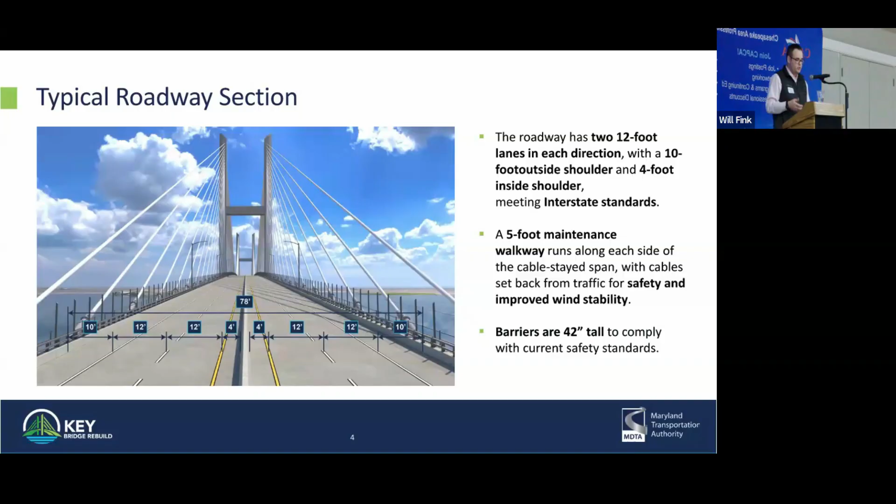Looking at the bridge layout itself, the distance between the 2 towers, which constitutes the main span of the bridge, is approximately 1,665 feet. The old bridge's distance between the 2 towers was approximately 1,200 feet, so we're several hundred feet farther from the channel in both directions compared to the previous bridge. This bridge is also a little unique in that it's very symmetrical in its backspan, with the overall length being approximately double the main channel width.

We'll have a minimum vertical clearance of 230 feet above the navigation channel. And because the channel is 800 feet wide, the center of the bridge is actually 10 or 15 feet higher than that minimum vertical clearance.

So as I alluded to before, with the cable stays and the cable strands, there's 144 of those, 72 on each tower, and then they're distributed evenly so that there are, I believe, 18 sections going out towards the middle on each side, and each of those cables supports one of those sections of deck.

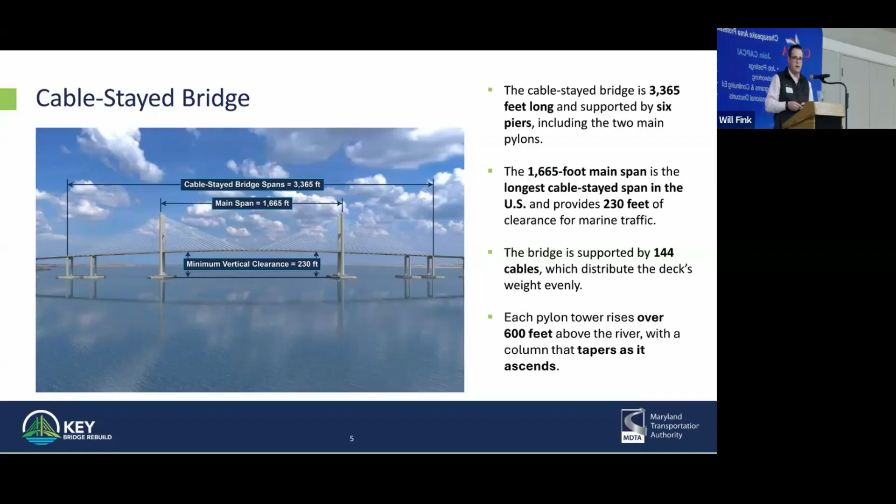Those are oriented in that goalpost or tower-like design that you've seen in the previous renderings.

The foundations with the cable stayed bridge are substantial. They have to resist a tremendous amount of force as they span such a wide distance. They have 6 total piers, 3 on each side. We're looking at the southern side, and it's mirrored on the north side here. Each half of the bridge comes with a pylon that then goes into a tie-down pier and transitions to a more conventional bridge type at the transition pier. The transition pier and tie-down pier work together in order to withstand a lot of the uplift forces experienced on that side of the bridge.

Each of these smaller foundations, and I say small in quotes, they're quite large. Each of the smaller foundations here on the transition and tie down are founded with 10 8-foot diameter steel pipe piles that are all in excess of 200 feet in length. If you've seen us handling any of our large piling in the harbor over the past few months, those are those elements. We have 10 in each of those foundations.

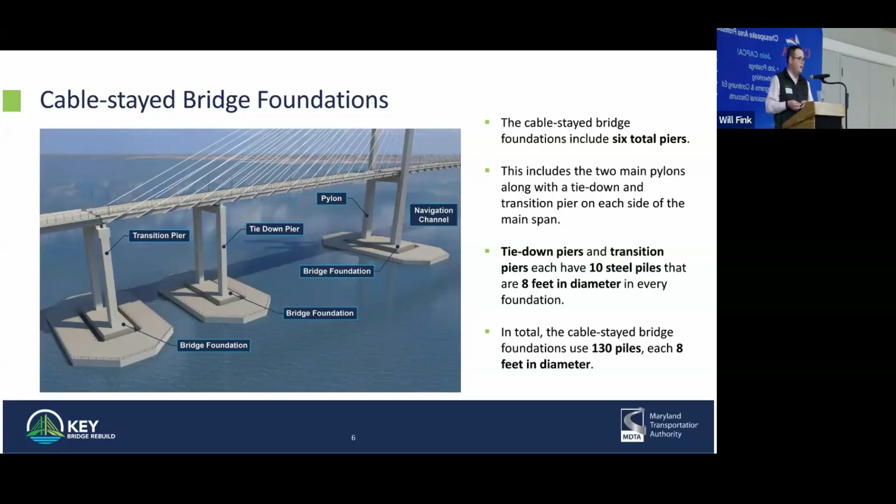And in the main bridge foundation, we have 45 of those large pipe piles. So that's 10 plus 10 plus 45 is 65. So we have 130 in the bridge itself. But that's dwarfed by the number that is in the vessel protection. And we'll get into that a little bit later.

So looking at a cross section here of those pile foundations, and this is our main pylon. It has those 45 8-foot pipe piles in a 5x9 formation. Like it says here, they're over 200 feet long and embedded 60 to 70 feet or so into what we call the Patapsco geological layer. It's a very dense sand layer that supports the bridge.

The Patapsco in some locations is 80 to 100 feet below the water surface, so there's a significant distance to go before we even get to that sound bearing layer, which is why the piles are so long.

The footing that we have is approximately 100 feet by 176 feet. We like to compare everything to sports stadiums and courts and whatnot, so this is approximately 2 NBA regulation basketball courts. The pile cap is actually above the water line and out of the splash zone, and that's in order to make it a more constructible element.

That pile cap is approximately 20 feet thick. Each of the pile caps is 13,000 cubic yards of concrete, which is an enormous amount of concrete that will get poured in 3 different lifts. Each of those lifts will take us approximately 36 hours to pour, with continual concrete delivery through those lifts where we're pouring 6 to 7 to 8 feet of concrete at a time. So you can see each foundation will have over 13 hundred truckloads of concrete, again placed in 3 layers.

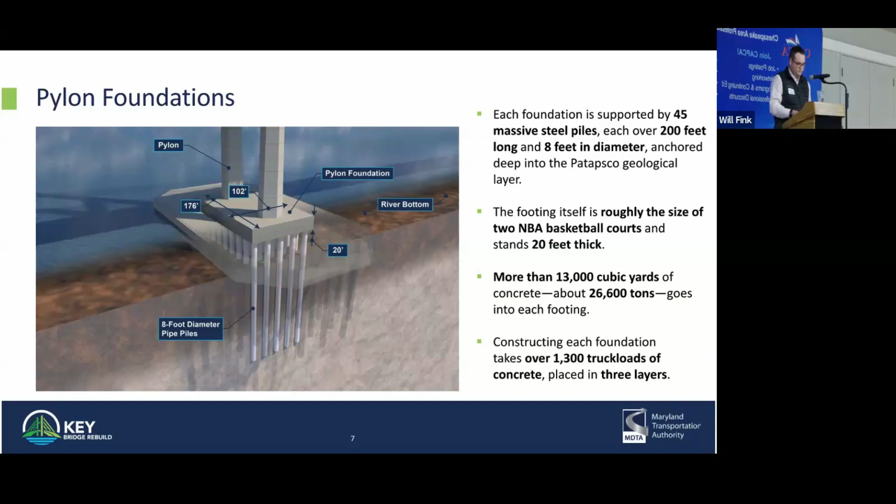Go into the pier protection system, and this is looking at that main pylon again. The pylon's foundation itself was large, about 100 by 176. The vessel protection or pier protection system is almost twice again as large, or more, where it's 374 feet on the long axis and 214 feet on the short axis.

I said that each of those main pylon foundations had 45 of those steel pipe piles. The pier protection system at the main foundations alone have 78. So they have half again, or almost twice as many piles as the foundation system that's holding up the entire bridge, and that's to withstand vessel impact in the event of any sort of future unfortunate events.

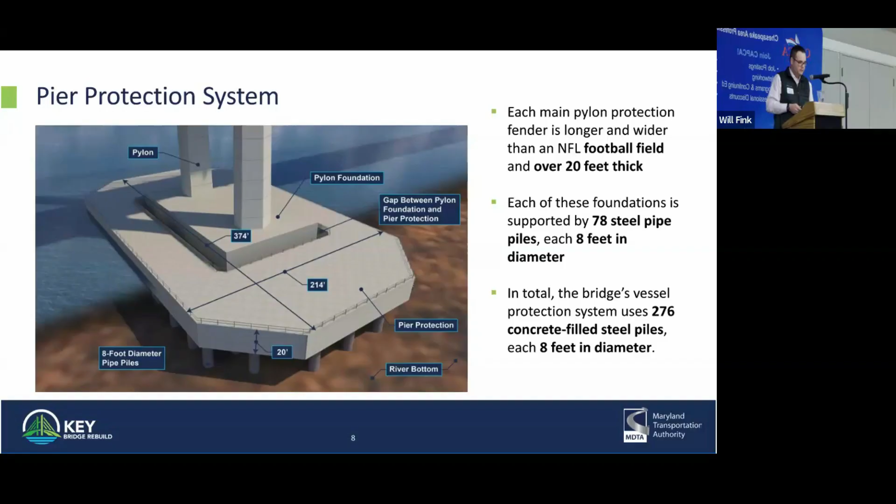We'll talk about some of our pre-construction activities, what we've been doing over the past a little over a year now. We've spent a substantial amount of time and effort collecting geotechnical borings, both on land and in the water.

We went through a process early last year of collecting borings along the original bridge alignment. What that allowed us to discover was that we had some elements in the way of building the new bridge. So we've actually shifted the bridge 260 feet to the east, away from Baltimore and towards the Chesapeake, in order to minimize any potential conflicts between buried materials in the river and where we're proposing to build. We did a geotechnical investigation on that first alignment, then went back out and did new geotechnical borings to ensure the new alignment was clear as well.

We got favorable results from both of those investigations. That wrapped up, I want to say September or October of last year, and was 6 to 8 months of geotechnical data collection.

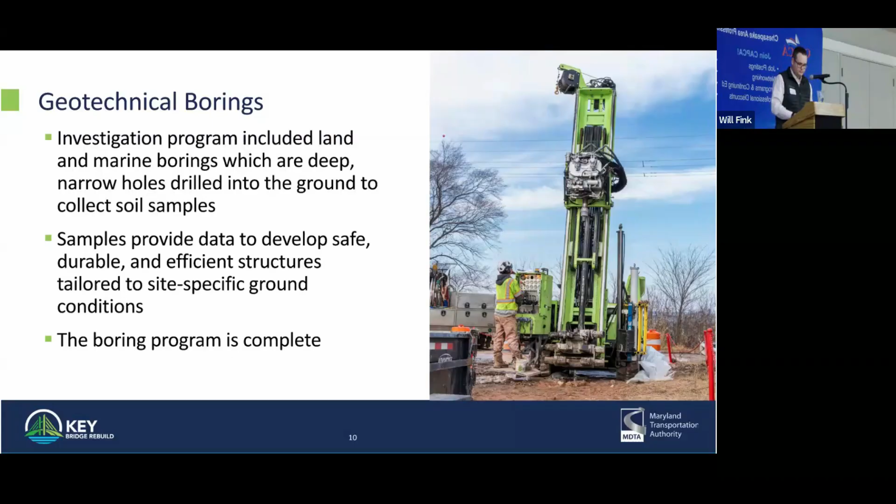Unique to this type of structure, and unique to very niche structures, we actually utilize a firm — our progressive design builder, Kiewit, utilized a firm called RWDI. They're a very boutique engineering firm who specializes in niche modeling opportunities. A lot of what they do is in the wind arena.

Because each cable-stayed bridge is a unique element, it's not an off-the-shelf design. You can't go to a design manual and say, based on the square footage of bridge deck, I know how this is going to interact. They have to create scale models of different elements of the bridge.

You can see this is a cross-section of the bridge deck fully loaded with traffic. They test it under different load conditions, under different wind conditions, and different angles of attack of the wind, in order to ensure you're not going to have any unexpected reactions once you get the bridge in service.

Everybody's seen the Tacoma Narrows galloping. You don't want that, obviously.

In addition to this, where they're testing low frequency oscillations, there's a phenomenon where you get no reaction from the bridge at low speed. You get to a certain wind level where you actually get some level of reaction. Then you get higher than that, and the reaction goes away. Then once you get to tornado levels or hurricane levels, the reaction comes back in.

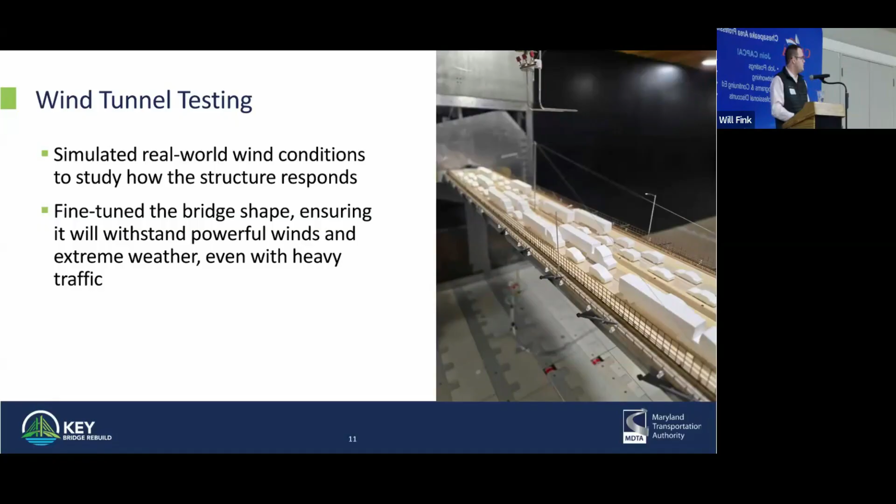So we talked about the air. Now we have to talk about the water.

Again, when you're working on a structure of this scale, none of the models, none of the conventional testing or analysis that's been done in a book is applicable to pile formations that are this large, that are of this scale, and that are in this type of geotechnical environment.

It's a lot of just what the Corps takes out with dredge. And it is a very soupy, messy layer that goes 30 to 50 feet deep in some locations.

So we were able to partner with the Federal Highway Administration's Turner Fairbanks Research Center down in McLean, Virginia, to help us do scale modeling of the Patapsco and of some of the unique river geometry that we have at the Key Bridge location, in order to test the scour that we might expect to experience at the foundation locations.

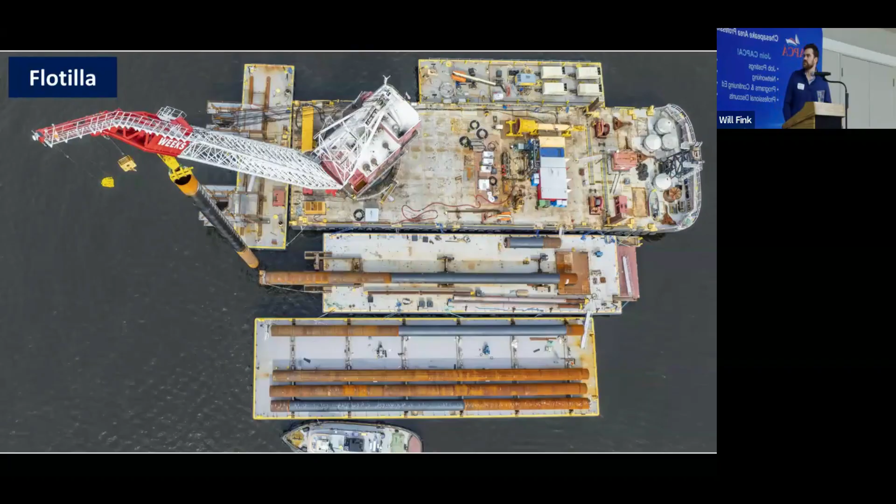In getting to each piece, the Weeks 533 is the workhorse of the foundation pile installation. It's a 500-ton derrick crane on a 300-foot by 100-foot barge. The crane is a Clyde 52, so the roller ring is 52 feet in diameter. This crane was made in the 60s and has gone through a handful of different contractors, but has been with Weeks Marine and Kiewit for about 25 years, and has a 250-foot crane boom that allows us to install these long 200-foot piles.

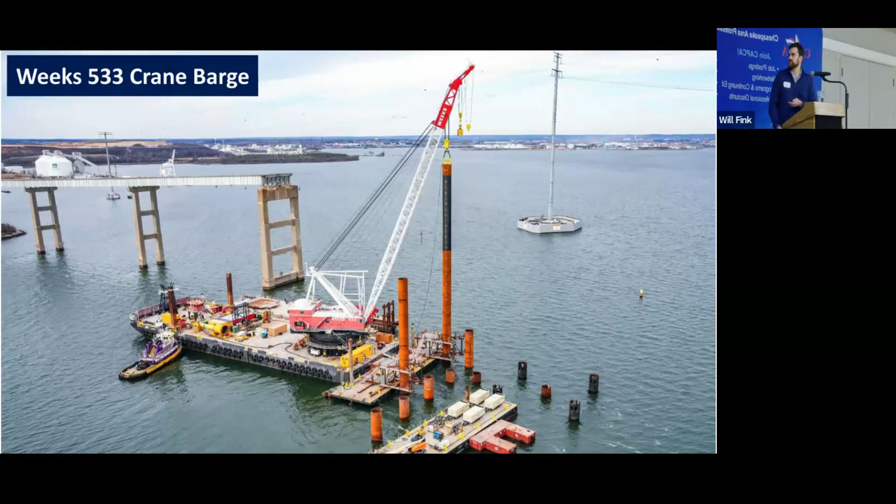Yeah, so this is looking up the boom down to us impacting a pile, and we'll get into more of the details of that operation shortly.

Another crane barge we have on site is the Weeks 577. It's a smaller crane with a 28-foot diameter ring, a much smaller barge used for smaller diameter piling, false work installation, and support hook work out on the river. This crane has been there throughout the load test after the piles are installed, installing the gauges and the jacks.

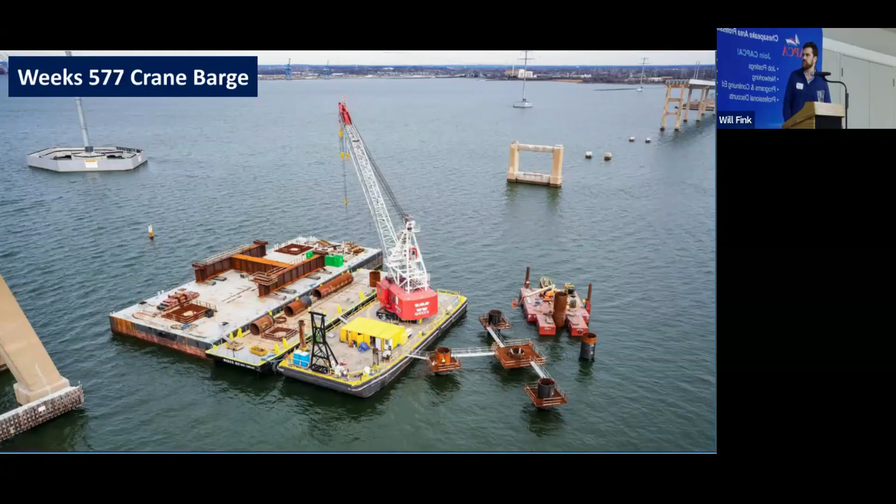It is a smaller crane. It has about 150 tons capacity, so still a fair amount of capacity for a floating derrick, but a little bit on a smaller scale than the 533.

So in order to install the piles, which range from 205 to 215 foot long with a 250-foot boom, we aren't allowed to trip and raise the pile off of a barge deck without lowering some of the pile's toe into the water line in order to give us the headroom. So what we do is we fabricated a tripping frame.

You can see it there on the barge in the center, which basically has a large seesaw effect that allows us to take the pile off of the supply barge on the right side, transload it into the tripping frame, and then upend it, so the toe of that pile enters the water and ends up right above mud line, which allows us to swing it into our false work to install the pile itself.

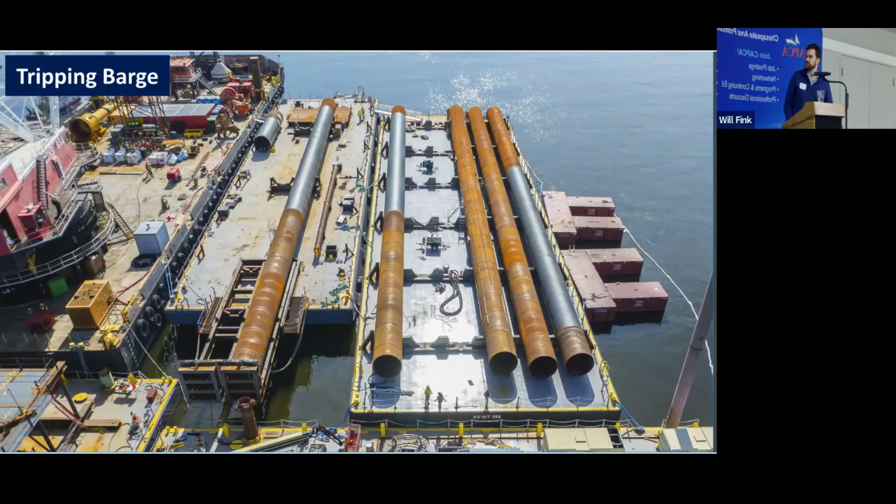We use vibratory hammers to install the pilings for their initial set, I'll call it. This is a common practice in marine construction, but on a bit larger scale for the relatively large 8-foot diameter pilings.

Basically, a vibratory hammer uses rotation to cause a vibrating effect to seat the steel pipe into the river bottom.

So while this doesn't create your final capacity, it allows you to take the pile as it's resting in mudline under self weight and seat it into its position, allowing for better quality of construction. Basically it allows you to hold your location of that piling as you go.

Yeah, so the next step is impacting, as you say, the pounding, which gets it to its final location and gives it its final capacity.

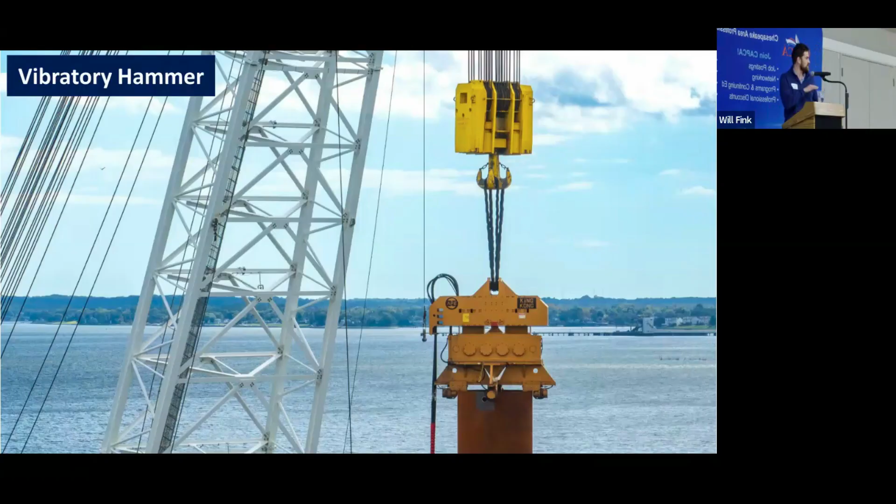So we have the impact hammer, which in this case is called a Menck 800, which refers to an 800 kilojoule hammer. The hammers are rated essentially by their maximum energy. In imperial units, it's more referred to as kip feet, 1,000 pounds times feet.

It's a relatively simple calculation, physics or statics, where if you have a 1,000-pound ram on a hammer that can rise 5 feet, that's 5 kip feet. So this is 800 kilojoules. I'm not too slick with the metric conversion, so bear with me, but that's what we have.

So it has a sleeve that sits over the top of the pile to get a good seat on the pile, and then impacts the hammer down into location, which we use a set of metrics based on the amount of blows of impacting per foot of advancement, which indicates you have the proper capacity on that pile.

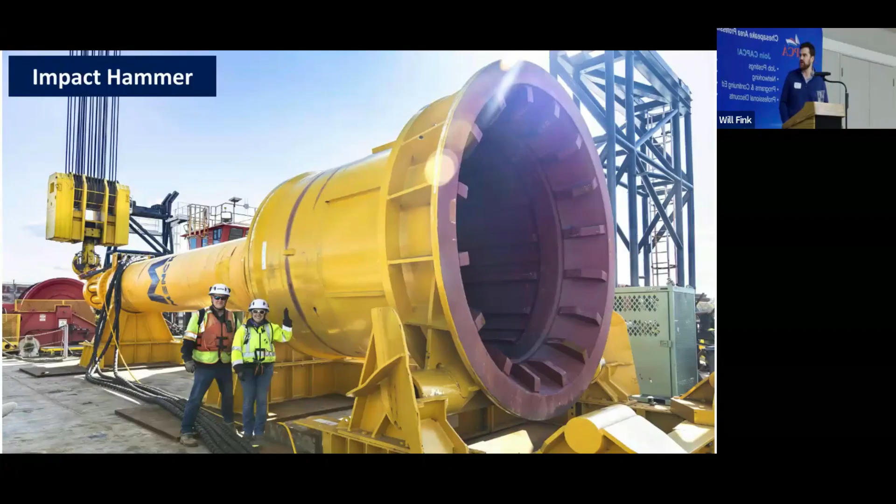So we also use, during our impacting, as an environmental mitigation, what's called a bubble curtain, which is essentially a shroud to protect the marine wildlife from the noise of impacting.

So this is what we have as a barge setup. It's relatively simple with a technical application. It's a series of air compressors fed into a manifold that distribute air into what ultimately results

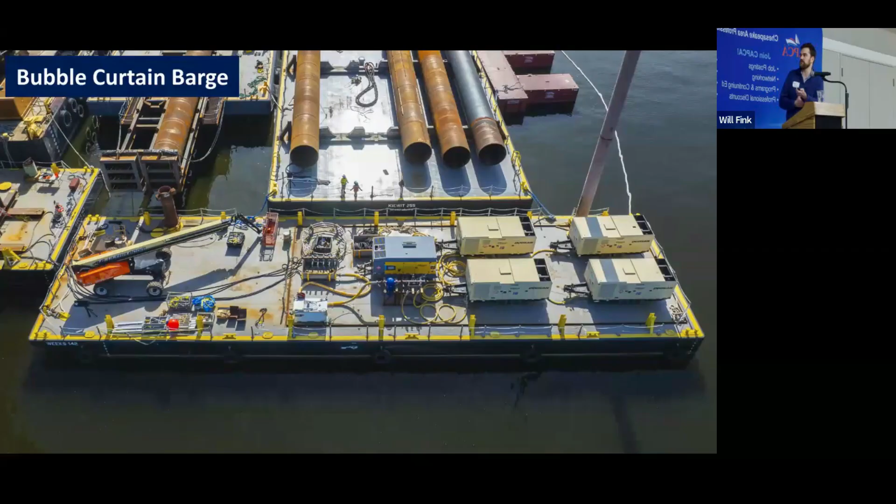in a bubble curtain. Pretty literal translation, but we have a column of rings that surround the pile itself that have perforations where the air is introduced. It creates a significant amount of bubbles and turbulence, which is a noise shroud for marine wildlife.

We try to keep the in-water decibels to round numbers below 200 decibels to protect the fish. This is a relatively common practice in bridge construction, not all marine construction, but mitigation strategies like the bubble curtain allow the schedule to accelerate and work through the full calendar year through fish spawning seasons and fish migratory patterns.

So we have a variety of marine support equipment out there. This tugboat we have here is a 3,000 horsepower tug, the High Roller, which is with Hayes Marine. We use a variety of tugs either on a spot hire or, in the High Roller's case, a dedicated boat basis, which brings our barges back and forth from moorings to the site, rearranging them around our barges as we need throughout the shifts and over time.

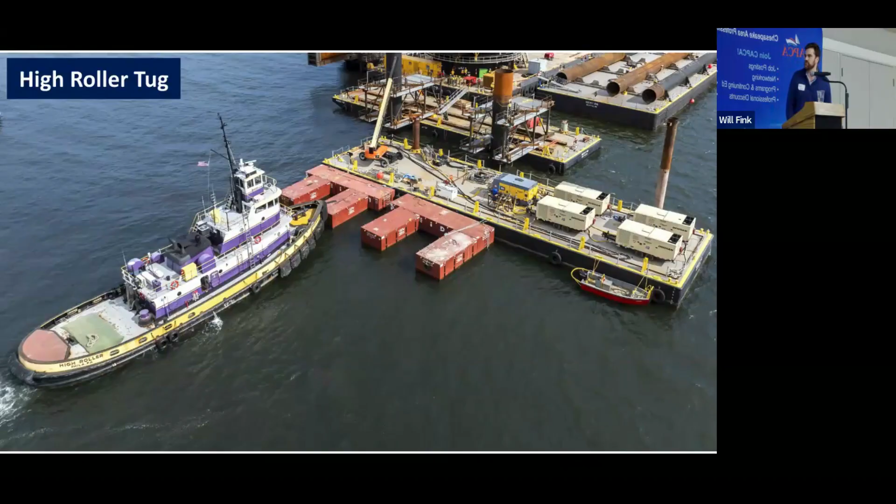So we talked about using the vibratory hammer to seat the pile into its location. We also use a series of false work to guide the pile as we go. We have a deck barge used with a two-tiered template, or false work system, which allows us to place the pile into the template as we take it off the barge and into location. Essentially, we pick up the pile, swing it over, put it into its false work, and let the pile rest under its self weight before we move to the next step and vibrate it in.

It's a relatively common practice in marine construction, but on a larger scale. You can see you've probably got a good 25-foot stairwell there to get to the upper level, and these two tiers really help us from a quality perspective, allowing us to get the pile plumb so we can drive it straight and keep it in location, and to provide a clean path for the loading ultimately from the pylon down.

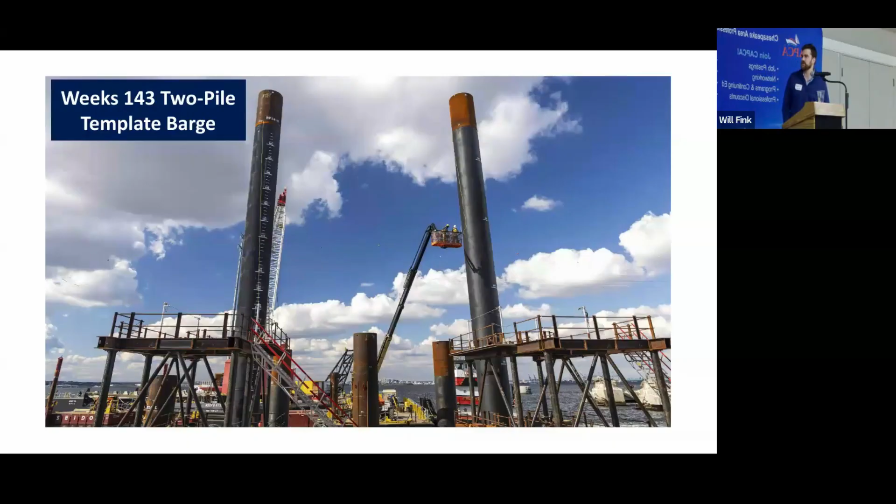So again, this is more of a front elevation or rear elevation view. The piles themselves typically have about 80 feet of embedment on self weight alone. This takes it down through some of those softer layers, goose crap essentially there at the top, and as the pile rests down, it seats itself into location under its own weight.

The Weeks 575 barge is another floating derrick we have there. This is a relatively mid-sized rig, I'd say. It's got a 28-foot diameter ring on the crane, and you get up to about 200 tons of capacity. We're using this for the trestle construction, which is a temporary false work structure that will be there through a significant amount of the bridge construction, to facilitate equipment, supplies, and labor getting out to the site.

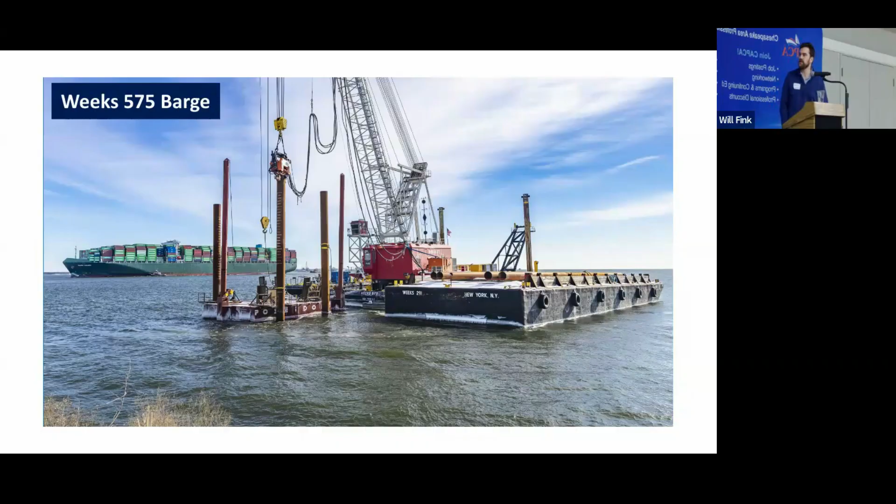A little bit more on the trestle here. So as you can see, this is looking on the bottom left, would be the south side of the bridge. A trestle structure is essentially driven pile, it's essentially a temporary overpass of steel fabricated material and wooden mat deck that allows us to set cranes, concrete trucks, different supplies, and allows our people to get back and forth out to the site. This will travel out along the approach side on the south side, out to the back span of the bridge, out to the piers.

And allows us to really continue and facilitate construction. And as you see it from the water, as you're navigating the river, this will be something in place that blocks that shore out from the south side, almost out to the navigation channel here, from the south and the north, starting early this year through late summer, early fall.

Yeah, sure. So, I just want to hammer home that point because this is of a lot of importance to our mariners, to anybody who's going to be operating a vessel on the water. This is a temporary bridge that's going to go from either side of, say, the Dundalk or the Glen Burnie side out to those main pylon locations.

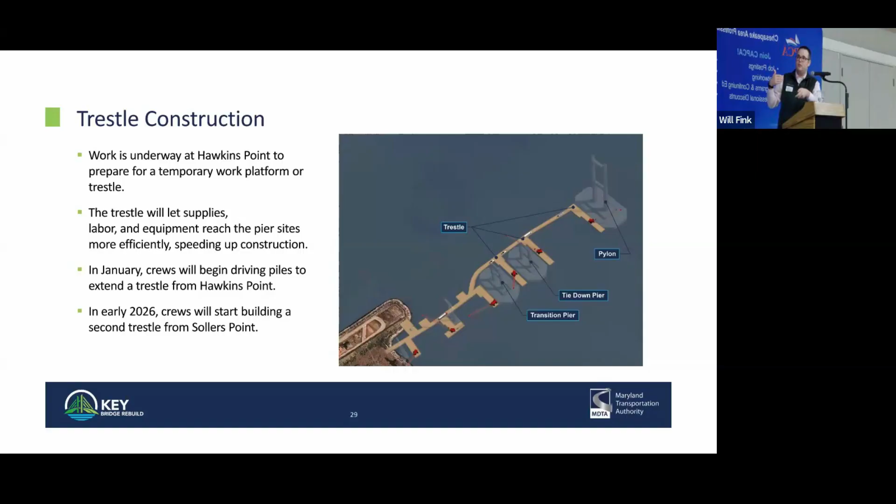So I just want to be clear that we are restricting vessel access through the project site and through the old bridge location to the shipping channel, to the federal channel, and then the area adjacent to the channel. That's what this visual is showing. Within the construction zone itself, I believe that's 1,000 feet on either side of the bridge, we have a no entry zone, which will encompass, and this is already in place. We do have some vessels that currently go through the no entry zone, but it is marked with buoys and will become impassable over the next 6 to 9 months.

Beyond that, we have a 6-knot no wake zone, which I believe is about 500 feet outside of that 1,000-foot no entry zone.

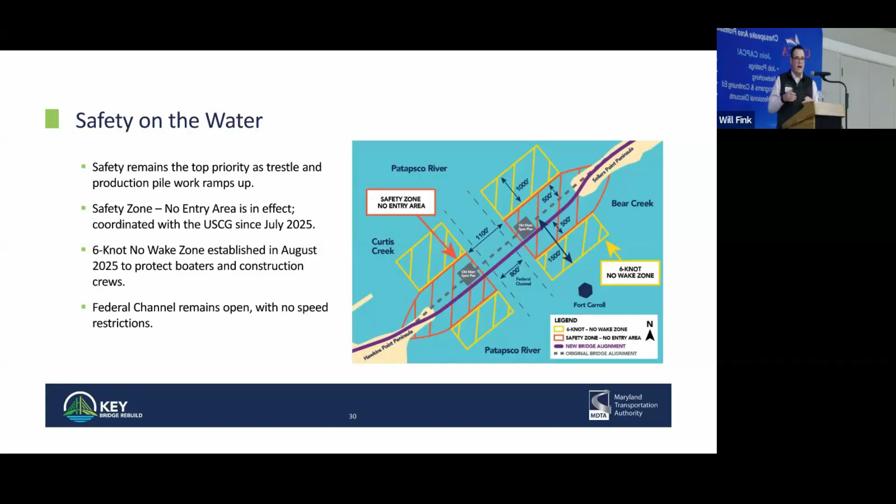That's why everything has to be almost perfect, because in order to ensure we're able to move on to the next step of construction without delay, we're prefabricating elements of those foundations off site, and there's only so much play they have one way or the other. So really it's a lot of effort at a large scale that ultimately ends up as a game of inches.

I think a lot of folks saw the news last year with an updated cost range and open-to-traffic date. We have the updated cost range of 4.3 to 5.2 billion, with an estimated open to traffic of late 2030. We had early estimates that were at a lower range.

We developed those extremely early in the process before we had any formalized site knowledge of the geology, of what would be possible and what wouldn't, the scale of this, and it was done as a programming mechanism in order to set up the federal funding eligibility while we were doing the recovery effort in the immediate aftermath of the bridge collapse.

Within the past 14 months, probably more like 16, we've reached 70% design completion. On comparable bridge projects, that's a process that takes 6 to 7 years, not to mention the probably 10 years they spent in planning before they got to the design part that took them 6 to 7 years.

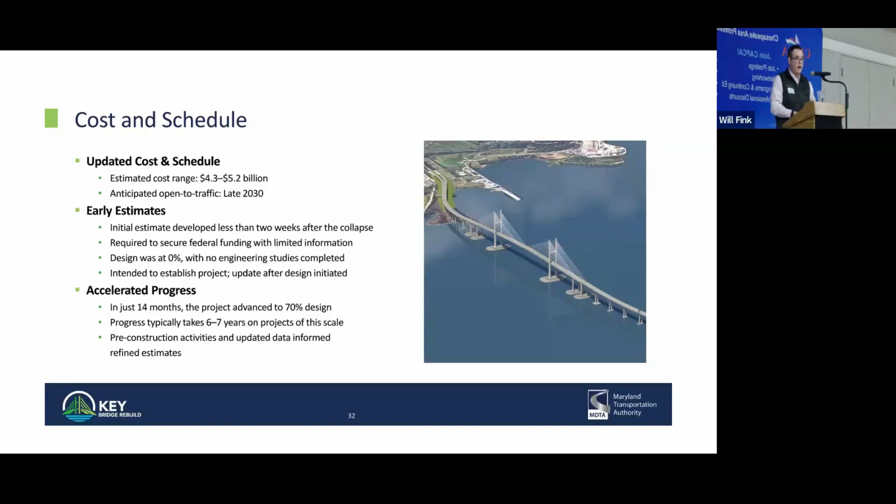So again, those key cost drivers — I don't think we contemplated this type of pier protection being required, which was necessitated by the geology at the site, that goose poop layer that's at the base of the Patapsco. On top of that strong layer, it provides no structural contribution to anything, and made more conventional construction techniques either completely non-constructible or impractical.

The main span of the bridge, again, is longer than originally anticipated, and we've seen continued escalation in the construction sector as we go out on projects of this scale, which was not contemplated at the time we put together that initial estimate. So with what we're putting together, we're meeting modern design standards, federal requirements, and best practices.

Moving forward, we can go back and look at some of the pictures that John showed. Some show the first pilings that are going to be part of the actual pylon foundations and those pier protection element foundations. John, do you have a current count for how many piles we've installed?

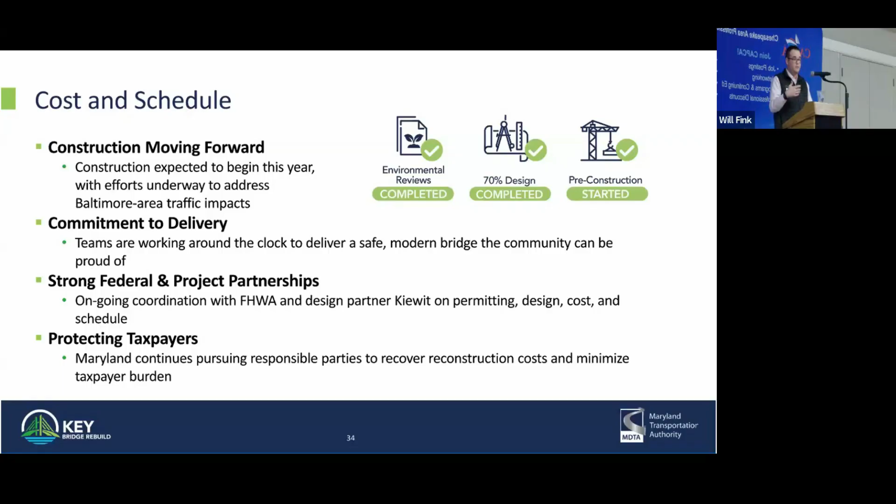Looking at where we are and what we've been doing, we started this process in summer 2024. We're in winter 2026 now. We've started trestle construction and pylon construction, which are repetitive activities that have to get done before we start building up. Once we start building up, we'll see foundation work start, and then we'll go vertical. A lot of this is repetitive because we've got this long bridge span across the water. But as we get further into construction, we'll get more economy and get smarter about how we build, and hopefully gain time as we go.

So really, we're working on that pylon construction, starting our build effort in earnest with an agreement this summer with Kiewit, working on the approach span bridges, and then starting to hang those cable-stayed spans out in 2028.

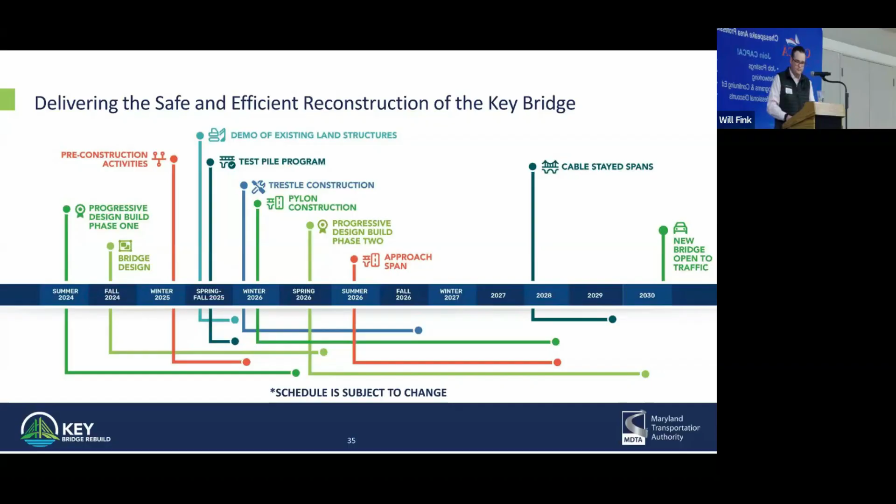Right on the edge of the clicker working, so I apologize.

We've done a tremendous amount of engagement. We have a crew who helps spearhead our engagement, and I just come here and talk. They do all the work of prepping and getting everything in order and making sure I show up on time.

We've had over 100 pop-up events and over 50 speaking engagements. We encourage you to take our survey on the website, tell us what we're doing well and what we could improve on. We count our connections at those pop-up events and speaking engagements.

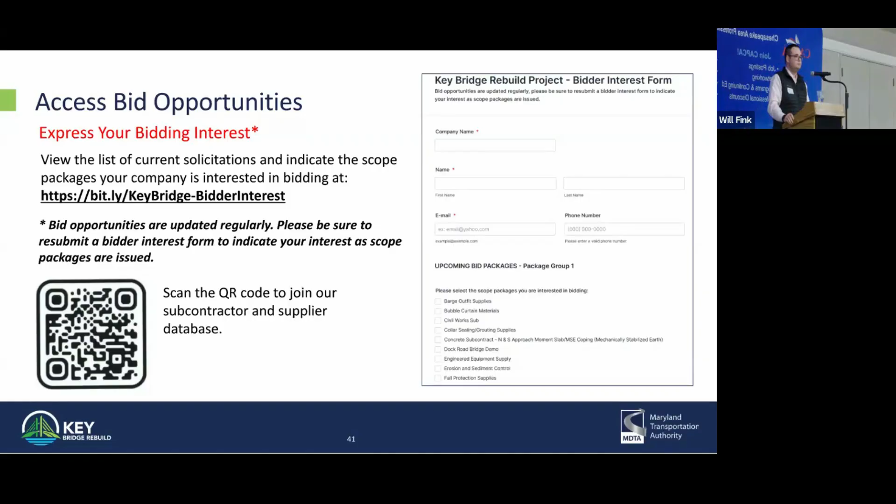Just curious, before this final decision was made on the bridge, did they do an analysis of doing a tunnel instead of a bridge? And if so, what was the cost differential?

Because of the funding mechanism we have, called the Emergency Relief Program, anytime there's a disaster event that results in a complete loss like we experienced, you're eligible to receive funding to replace what was lost, and it has to be in the nature of the previous system. So because of that funding mechanism, we weren't able to utilize that funding towards a tunnel.

Beyond that, because we have the Harbor Tunnel and Fort McHenry in Baltimore, other than the Beltway itself, there's no interstate system that provides unrestricted access to the port, both from a width and height perspective, as well as for hazardous material haulers who go in and out of the port facilities.

So in order to meet the needs of the port and the businesses surrounding it, and going back to when the bridge was originally constructed, it was contemplated as a tunnel in the late 60s and early 70s, but due to these similar restrictions, it was transitioned to a bridge instead of a tunnel.

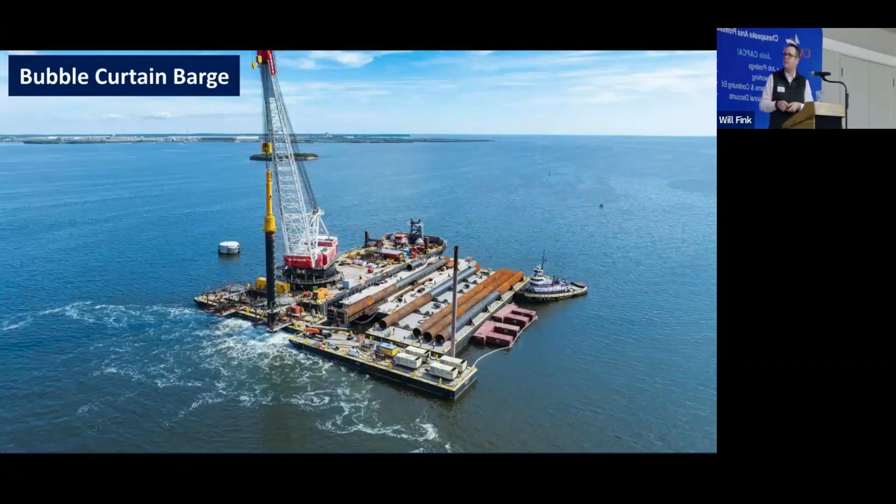And again, that's a reason why that trestle is so important. Really, the bridge, once you get to a high enough location where you can start hanging the deck, you build it from the pylon out in both directions on both sides of the river at the same time.

So you could pre-assemble deck sections and lift them up, but that requires you to be below the bridge. We did an analysis and found that it was probably about the same duration either way. Stick building it in pieces, bolting up sections of girders, and then laying the deck on top of it, iteratively as you go away from the pylons, we believe is the less impactful option for ship traffic.

And we're working with the Coast Guard, the Army Corps, and the captain of the port to figure out what that scheme is exactly going to look like. There's going to be a dilemma zone where we can't have ship traffic below an unbolted section of girder.